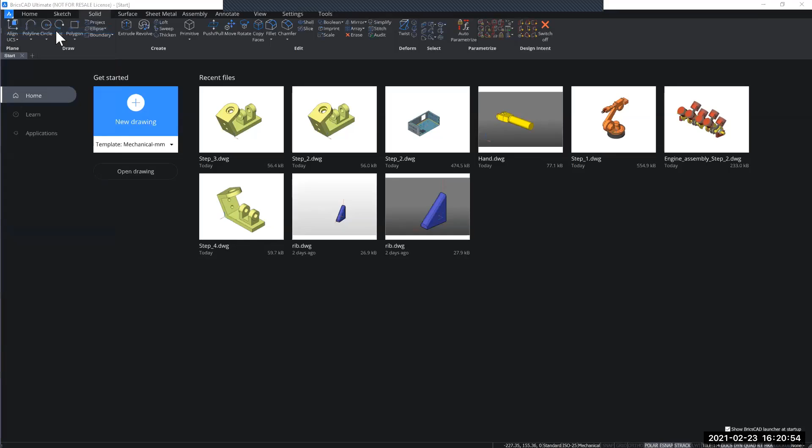And here I get some more options on how to create my new drawing. I will be choosing the start from template. If I select the next option, it will suggest me the basic templates that come with the application.

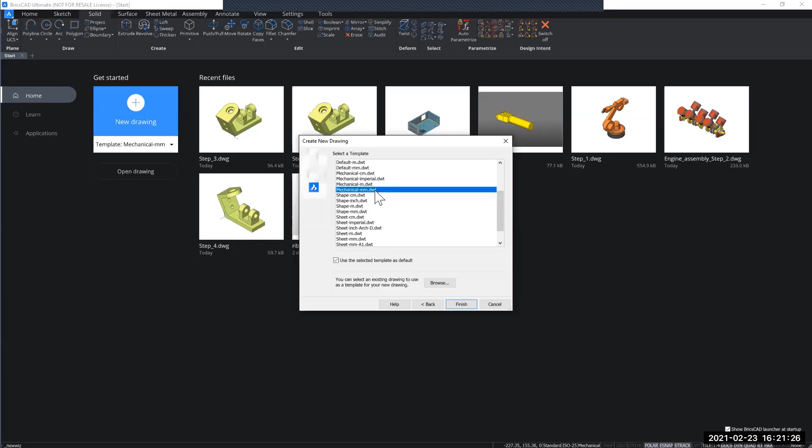You can also browse other templates that you might have created for yourself. But for this exercise, we will use the Mechanical-mm.dwt template. Once I click finish, I will be taken into the new drawing.

Now, when you sketch in BricsCAD, you can, of course, just sketch freely in the model space as such. But in this exercise, it instructs us to set up a certain set of variables. So I am going to do that.

As it says, it wants me to change the snap type. This I can do in the command line at the bottom of my screen. So I will activate snap type, and it tells me to set it to 0, which I will do. You can see now that the command is active.

You can see it through the command line dialog, that it tells me what to do for the next steps in the active command. And I will feed it the information it asks for, as it tells me in the instructions.

So I will continue typing the values and the commands listed in the training, such as snap mode, which I will set to 1. Grid mode, I will set to 1, and orbit auto target, which I will set to 1.

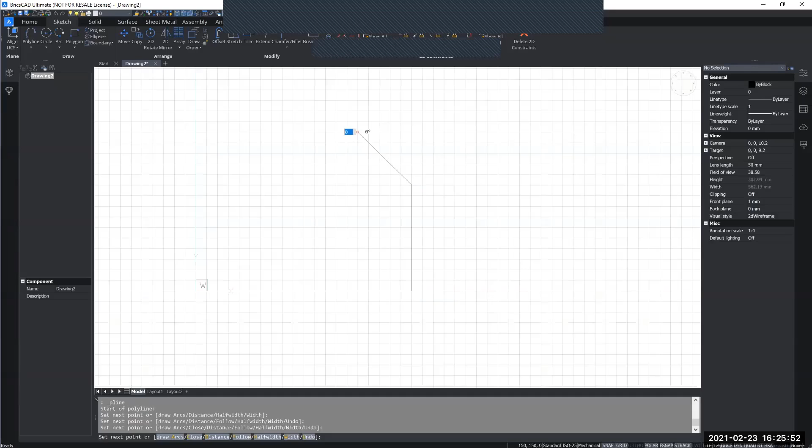So I will click to accept this. Following that up with a straight or horizontal 100 millimeter line. And then another 130-degree downwards line of 70.71 millimeters.

Now I can manually attach the last point here down to finish my sketch, but I can go down to the bottom of my screen to the command line where I can see the different command line options.

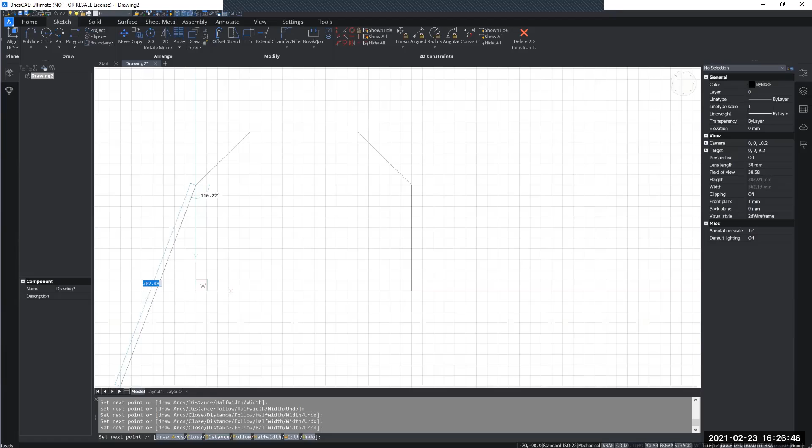Here you can see the different options such as the close option, which is what I will use. In newer versions, I can just click this option, but you can also type C or type it all out, close, in the command line and accept it. It will automatically close the geometry for you, and it is now listed as, or classified as, a polyline.

Now that showed us how to sketch with a grid. From now on, we will be working with a solid. So I'm going to follow step 7 and turn off some of these variables again, such as setting snap mode back to 0, grid mode back to 0, and changing the visual style back to mechanical.

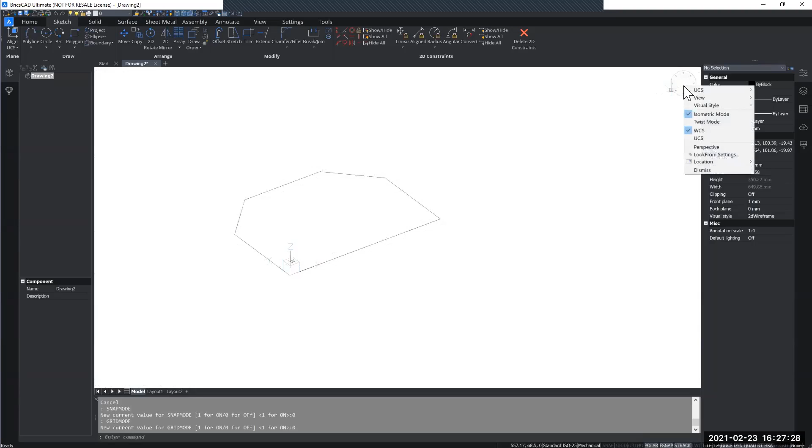This time I'm doing this by right-clicking on the Look From tool, hovering over the Visual Style sub-option, and selecting Mechanical. But of course, you can also do that by using the Visual Styles command as we did earlier.

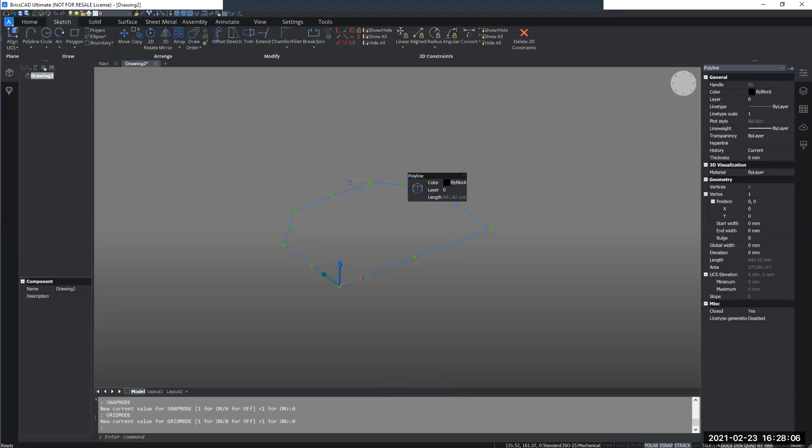Now we will want to extrude this sketch. For this, you can either highlight or select the sketch itself, or you can use boundary detection. The only difference is that if you use the sketch to extrude, the sketch will be consumed and only the solid will be left. If you use the boundary, you will still have the sketch here. However, for this exercise, it is not that important exactly which method you use.

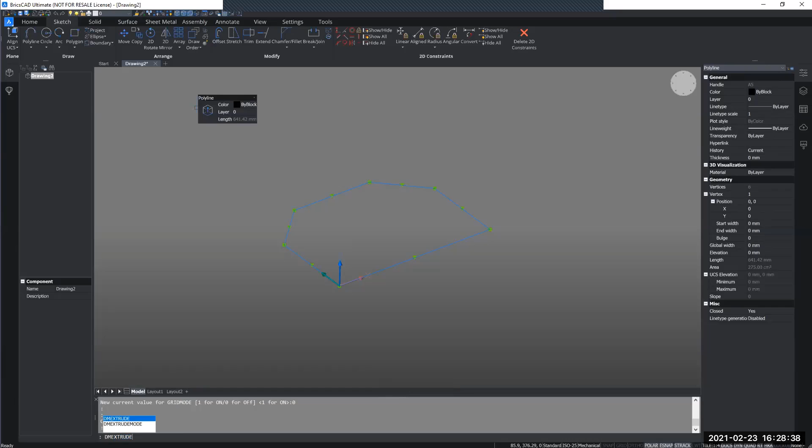So you can type in the dm extrude command in the command line. I'm going to change the color just to make it a bit more pleasant to look at. So I can type in dm extrude and then extrude it downwards, or 20 millimeters as instructed.

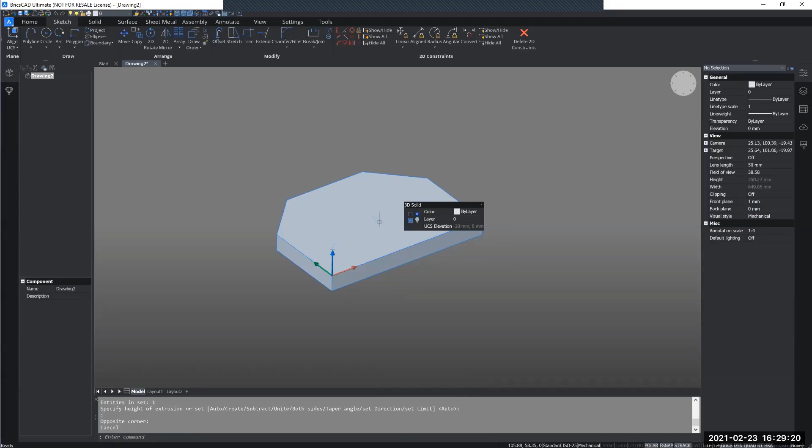Step 8 is also telling me to change the color of this base to green, so I will select it. To select it, you can hover over your model and hold down your Control key to have your solid highlighted. While it is highlighted like this, I will click it, and then I have my solid selected.

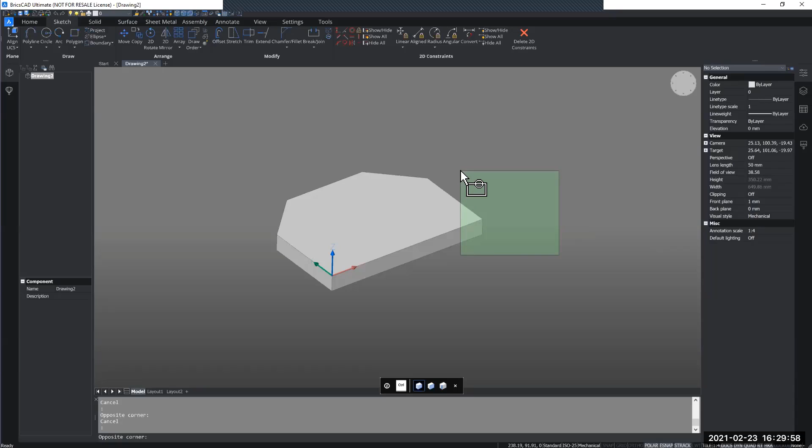I can also use selection windows. You might be familiar with this, that you can click somewhere on your screen and drag your cursor to either side. If I drag my cursor to the right, it will select anything that is completely engulfed by this selection window. If I drag it to the left, it will select anything that just touches this selection window, as such. Then from the properties panel, I can go to the color section, and I can select the green color.

Again, if you do not have this properties panel, you can right-click on your ribbon, hover over panels, and you can find the properties panel down here.

So for the next steps, we are going to be using sketches, and we will be sketching on the solid model itself. Therefore, it is useful for you to have the dynamic UCS activated.

You can see if you have the dynamic UCS activated down on your status bar, it will be called DUCS. Here you can toggle it on and off, similar to the eSnap settings. You can also use the F6 key on your keyboard to toggle this setting.

What this DUCS option, or dynamic UCS, will do is align the origin point, in a sense, to what you are selecting or hovering over when having a command active. I will be showing it now.

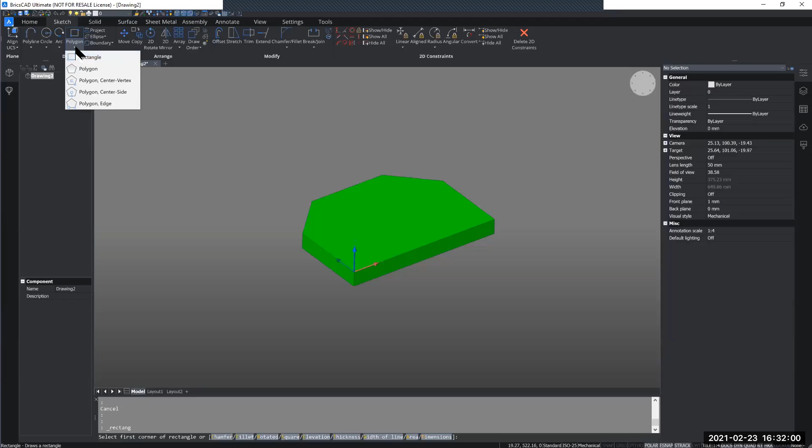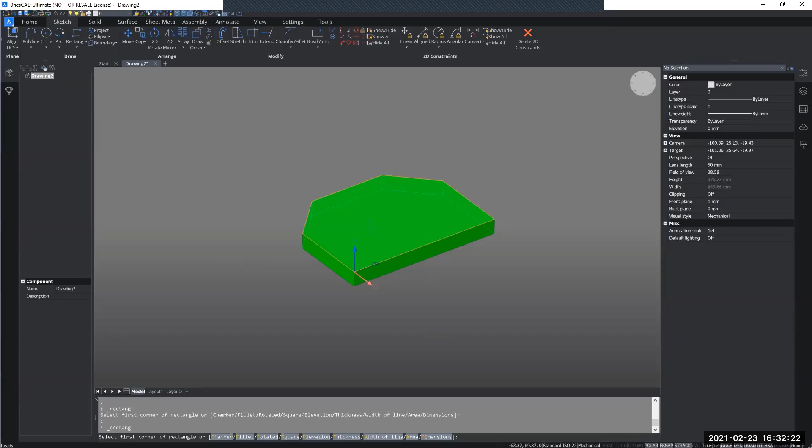And now I can choose what side of this to sketch on. As you can see, the coordinate system is kind of adapting to the face I am putting my cursor on, and this is what the dynamic UCS does. So now it is aligned with this surface, and I can sketch on this.

However, if I want to be completely sure that it is locked onto this surface and my sketch will stay on this surface, I can click the Shift key on my keyboard while hovering over it, and it will turn a darker color. Then you will know that what you sketch will remain in this plane.

So I will just change the color of my sketch so it is a bit easier to see.

And then I will start drawing my rectangle. I just click somewhere to start the command, and then I select the second position to finish it. I will be prompted with these measurements, as you can see. The one highlighted in blue is the one I can currently edit by typing on my keyboard, and I will give it the value of 60 millimeters in that direction.

To change to the other measurement, I can press Tab on my keyboard, and it will change to the other one, and I can type in 20 millimeters there as instructed in the guide.

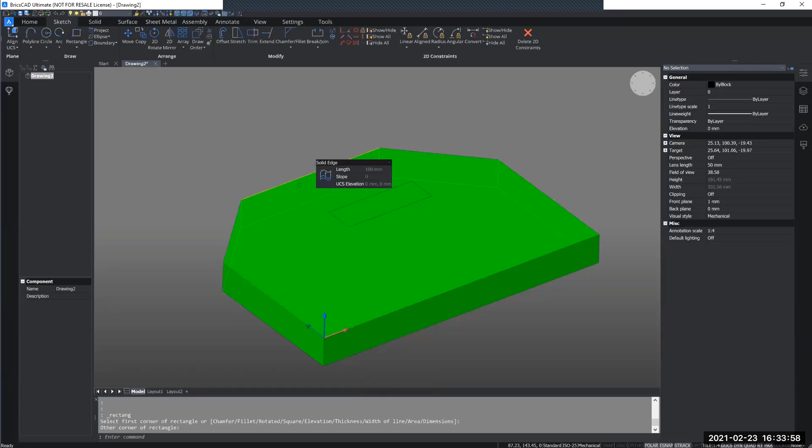Now it is also saying that this rectangle should be aligned in the middle of this edge here and up against it. To do this, we can use the move commands. So I can select my rectangle and use the move command, or DMMOVE command.

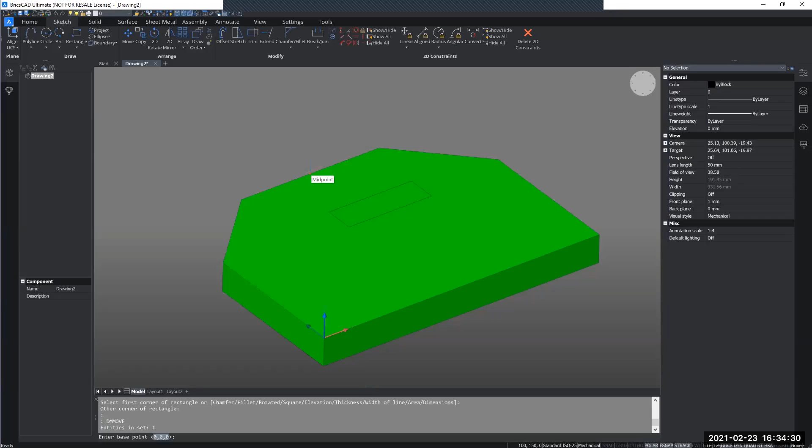Now I want to snap the midpoint of my rectangle onto the midpoint of this back edge. This is where the eSnap settings are important, so you need to have the midpoint snapping options active. If you do not have it active in the eSnap settings on your status bar, you can always hold Shift and right click, and here you can activate it.

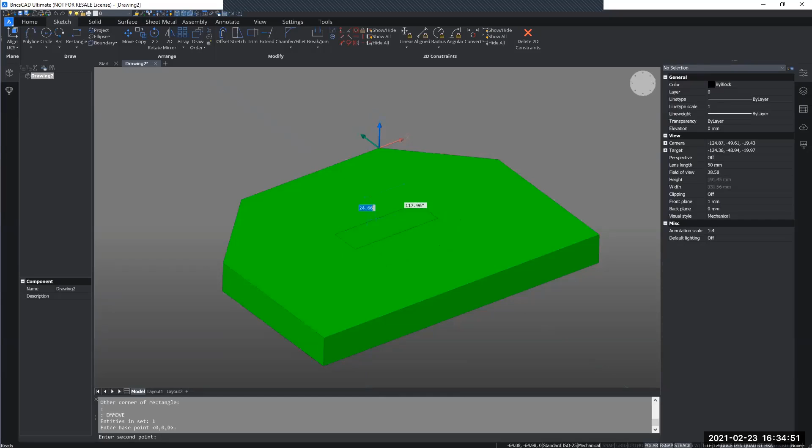And then I can select the midpoint of my sketch. Now I can move it around freely, as you can see, and then I can snap it onto the midpoint of the back edge.

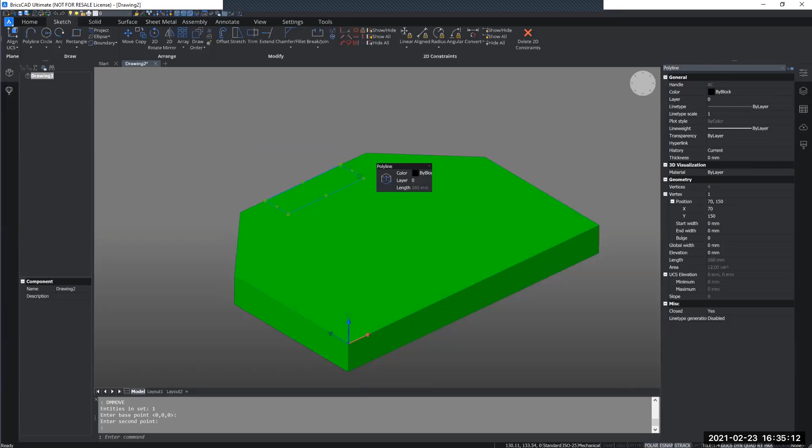Once that is done, I can extrude it similarly to what I did with the base flange. I can now show it by selecting or hovering over the sketch, and go into my quad under the model tab. Here I can find the solid extrude option, and I will give it a value of 150 millimeters as instructed in the guide.

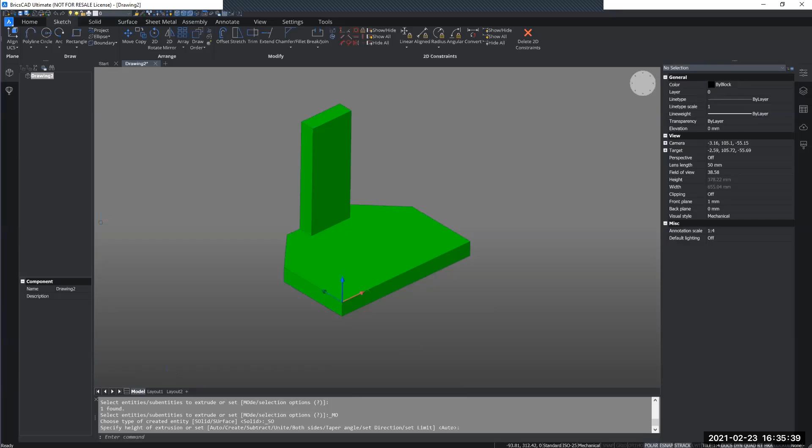Following this is step 11, where I will create a circle on this face. To do this, you can type the circle command in the command line, or go to the ribbon and activate the circle command.

Again, you need the midpoint snapping options active, as you want to start the circle off in this midpoint. Make sure you are not aligned with this top face, as the sketch or the circle will be tilted the wrong way.

You will have to sketch it on this face. To make sure that you do so, you can hover over it and click Shift to lock into the surface. So now, even if I hover over the other face, it will still sketch in the face that I locked into.

So I will draw the circle sketch. It does not give me a value in the radius, it only tells me to snap onto the corner of my model.

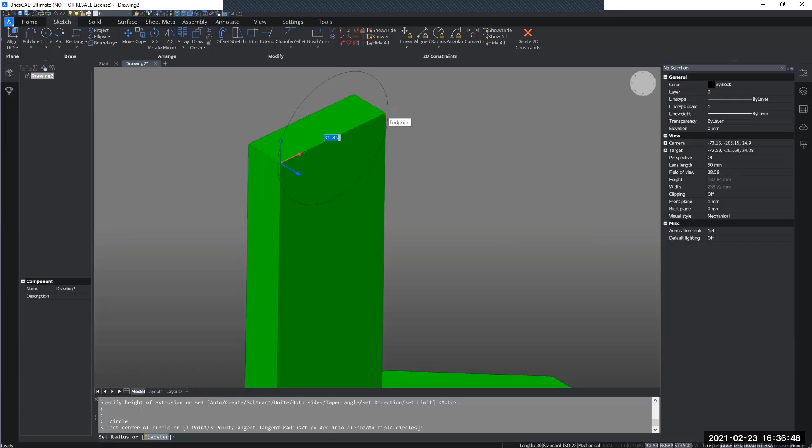So I will need the endpoint snapping option active, as this is listed as an endpoint. Again, you can find the snapping options in eSnap on the bottom of your screen in the status bar, or by holding Shift and right-clicking. And so that distance decides my radius.

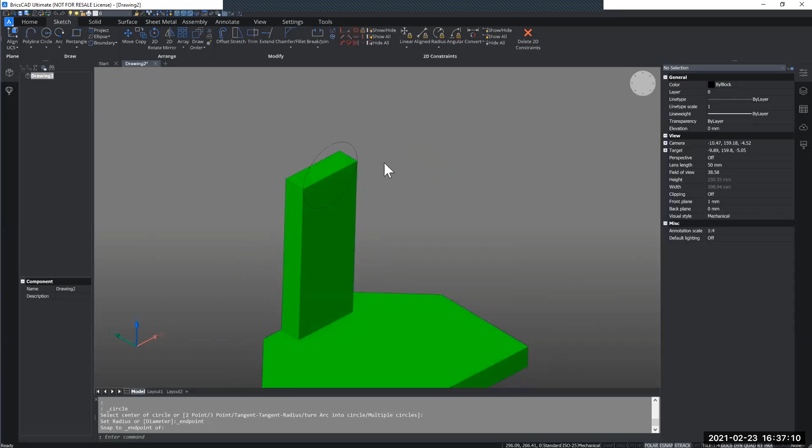From then, I will similarly extrude my circle. I will extrude it outwards like this by 130 millimeters.

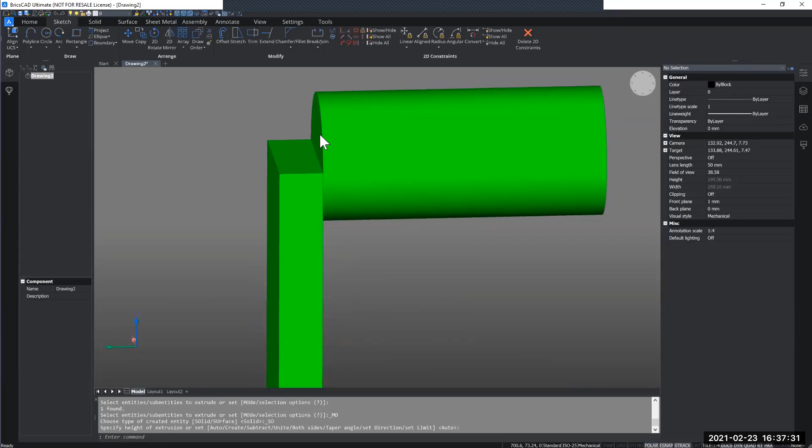Now for step 12, you can see that there is a bit of a notch in the back here, as this is where the sketch originated from, and I only extruded it in the direction outwards from here. But I would like to make this backside flush.

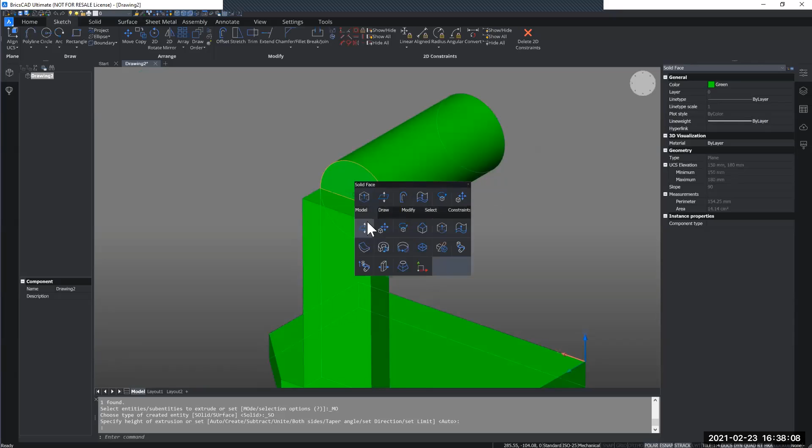To do this, you will need to pay attention to your selection modes. You need to have the selection of faces active, because then you can hover over and select this back face, or the half circle back face of this cylinder geometry. And then similarly, you can extrude this as well.

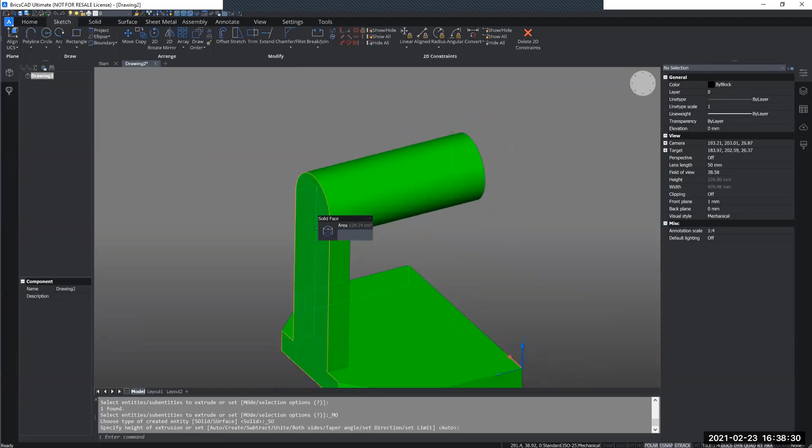You can snap it onto the endpoint here, for example, or the midpoint, and it will extrude the geometry until the endpoint there. So I have created a flush, nice look on the back of my model.

Now to introduce something new, there is something called design intent in BricsCAD. If I go to the solid tab, as we are doing solid editing now, you will see the section called design intent right over my cursor here. These settings will determine how your different solids or the geometry of your model behaves depending on other aspects of your geometry.

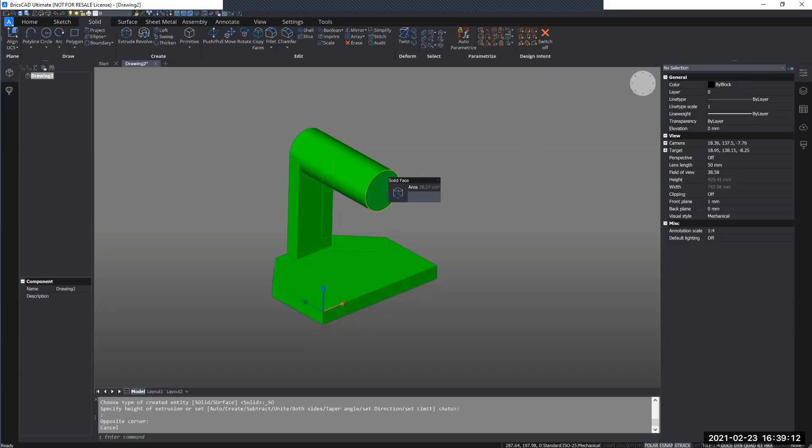So if I now try to move this face here, I will hover over this face and call the push-pull command through the quad and the model tab. You will see that I can push and pull on this face and extend it and shorten it.

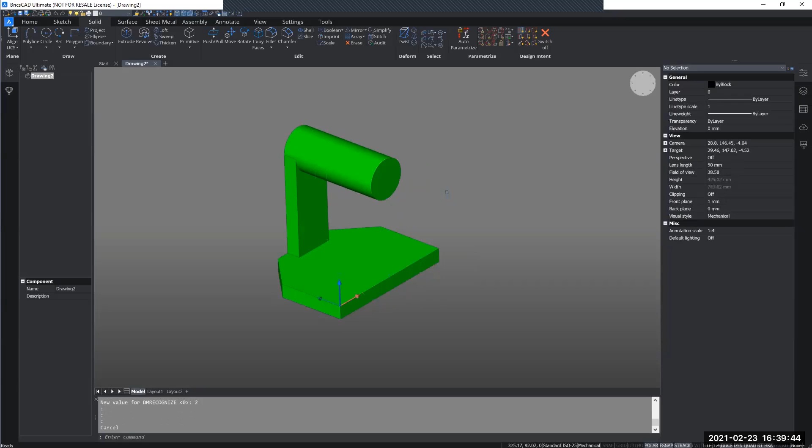But with this design intent option here that I will activate called coincident planes, it will detect places that are coincident to each other. If I've done everything correctly now, this face should be coincident with the bottom face of the base. So if I now again try to push-pull on this face, it will also adjust any coincident faces on my model.

So that's an example of something design intent can do. We will also see more of the design intent options later in the training.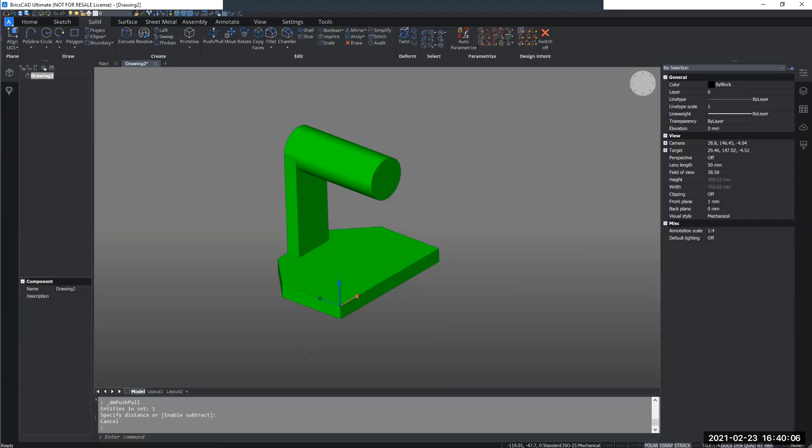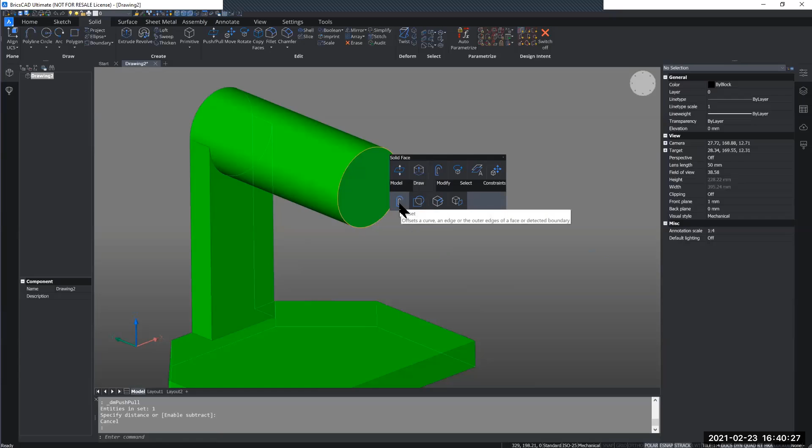But first, I would like to hollow out this cylinder right here. To do this, I can create another circle sketch as before, but I can also hover over it and go through my quad to the draw section. Here I can find the offset tool. I can also select my face and go to the Sketch tab where I can also find the offset tool, but I find it easier to just go through the quad and get used to using it.

Here you can see it is creating an offset sketch of the outer geometry of the cylinder. It is taking the shape of the cylinder and offsetting a new sketch for me. I will move it inwards and give it a value of 5 millimeters. So now I have created a circular sketch, offset 5 millimeters from the outside of the cylinder.

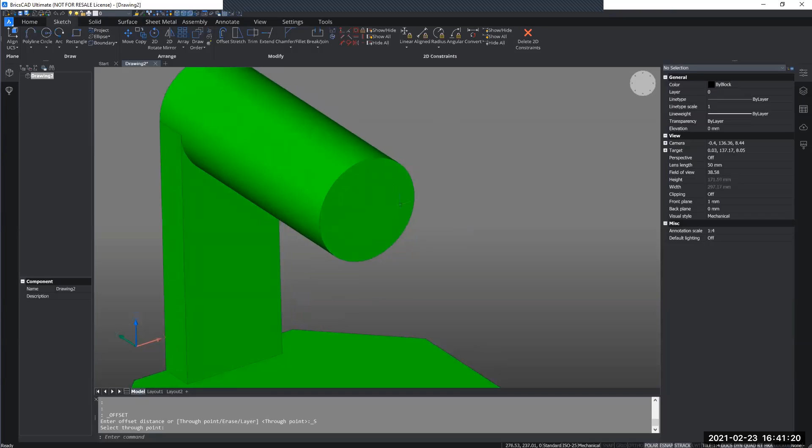Then, like before, I will select the sketch and extrude it. But instead of adding material this time, I'm going to go in towards my model and all the way through, so that I extrude a hole all the way through my model.

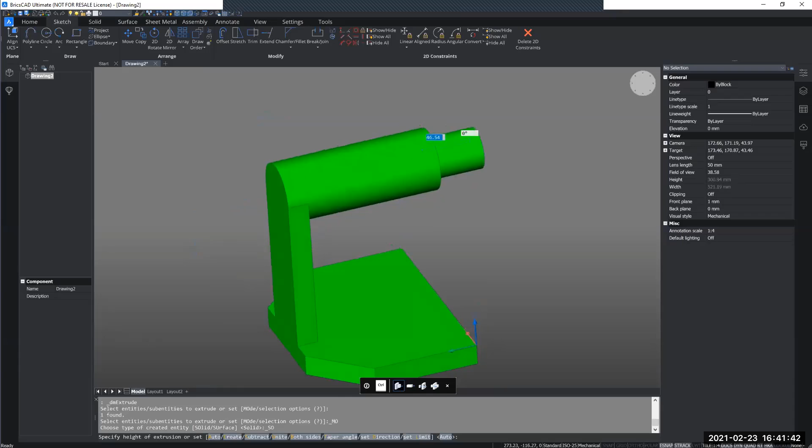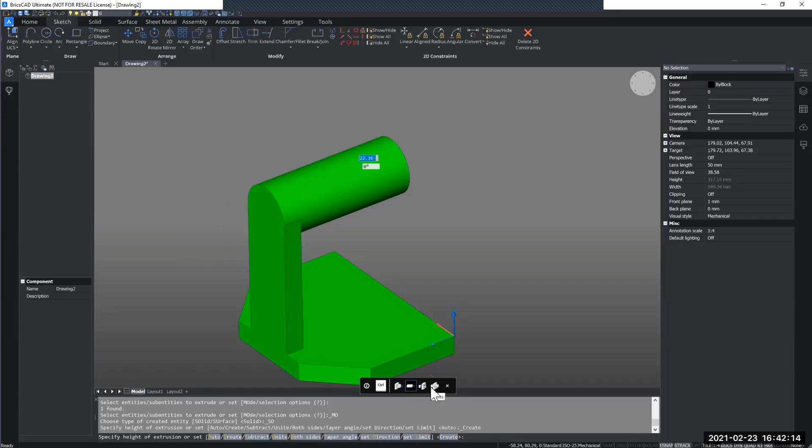If your program does not remove material, you can check the bottom here, right over my command line. You can see there are different control toggle options. If you have your command active and you toggle the control button on your keyboard, you can toggle between options such as now it is in the auto setting. If I toggle, I can go to the create option where it will only create new material. There is also subtract and unite, but I will just let it go on auto and it will detect for me that I am removing material. The distance doesn't matter as long as it protrudes away or through the back face here.

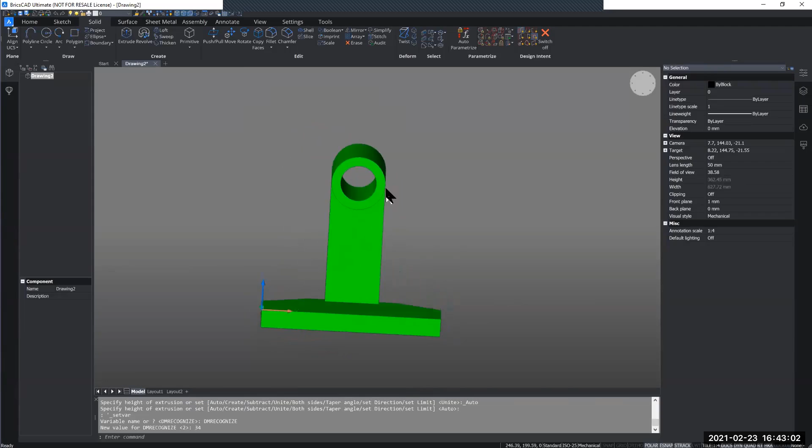For step 16, we will try a new design intent in the solid tab. Here I will activate the coaxial surfaces option. This will detect any circular surfaces that share a center, and revolve around the same point, which should be these two faces or these two cylinders.

So if I try to now use the move command, I can select that I want to move the outer face of this cylinder. And I will select this, and now I can move the cylinder around, and the inner face will stay coaxial and share the same center as the outer face.

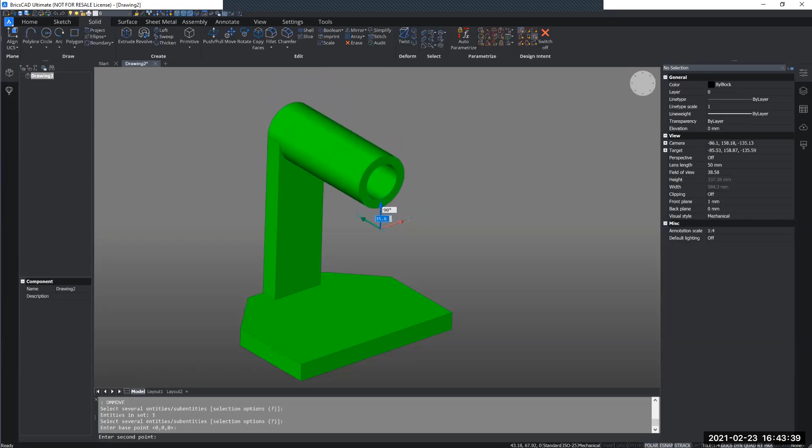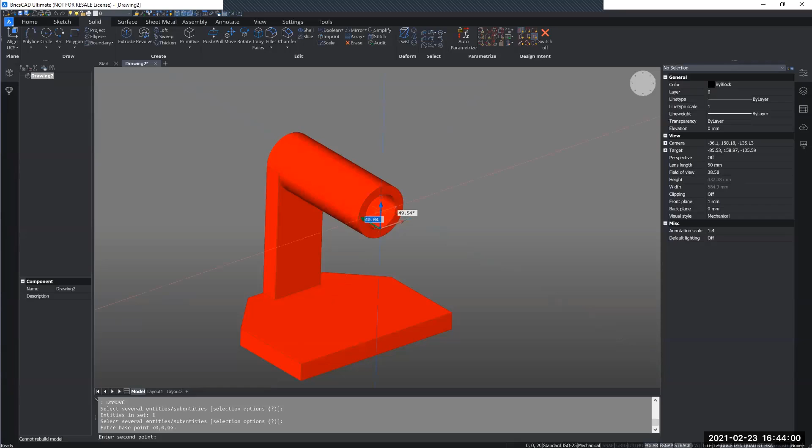If you try this and try to move it around, you might see this result where you move your cursor and nothing is happening and it turns red. If you hold the shift key on your keyboard while you're trying to move it, the cursor or movement will lock itself to a certain axis in your drawing. So if I now hold shift and move my cursor up along the Z axis, it will stick to this axis even if I move my cursor around other places. That's a little trick to make it a little bit easier.

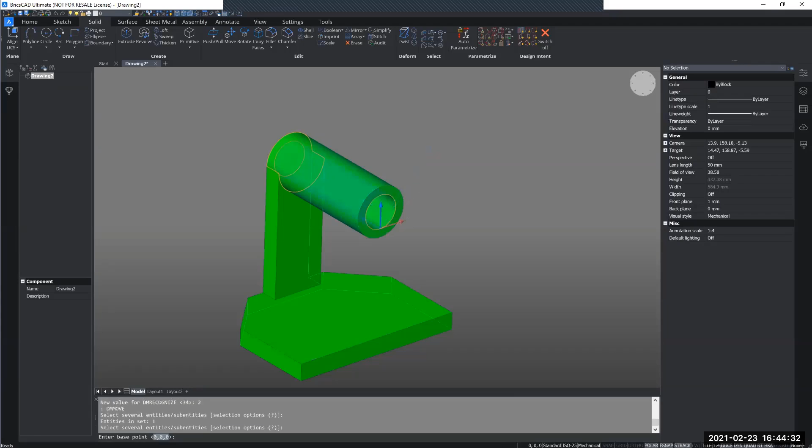If I disable this coaxial design intent and try to move it again, I can show you what happens. I will select exactly the same things as before and try to move it, but now it only moves the geometry of the cylinder and the outer face, and the hole that goes through it will remain in the same place. So that will show you how the coaxial design intent works.

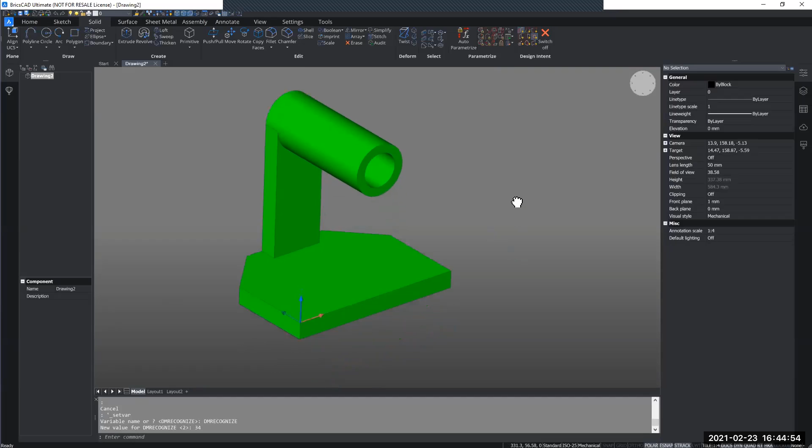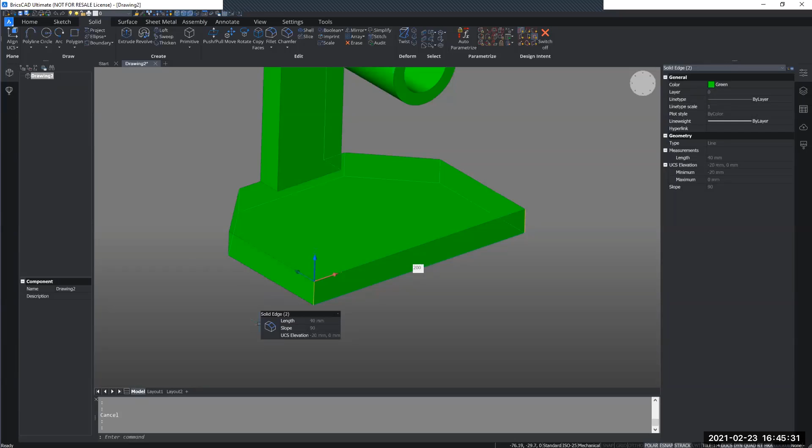Now to add some more detailing to our part, we want to add some fillets to the front of the base here. We can select the edges one by one and apply a fillet, because that is what is instructed to give it a fillet. But you can also select both of the edges at once. Make sure you have the selection of edges activated on the top of your screen. Then we can type in the command dm fillet, or we can also go through the quad to access the fillet command, or you can also go through the ribbon, of course. And I will give that a value of 25 millimeters, as such.

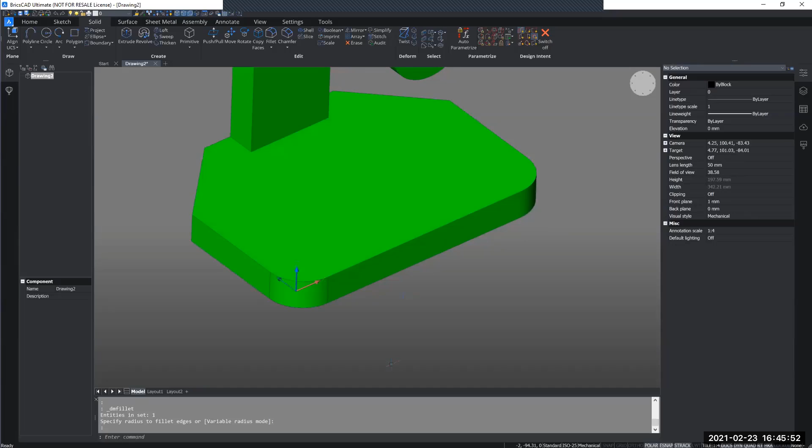Following this, we want to create 2 holes as well on the base, and we want these holes to share the same center as these radiuses or radii.

So for the next exercise, you will need to have the eSnap option center active, as you will see shortly. I will activate the circle command from the ribbon like I've done before. I will hover over the face I want to place the holes and click Shift to lock into it.

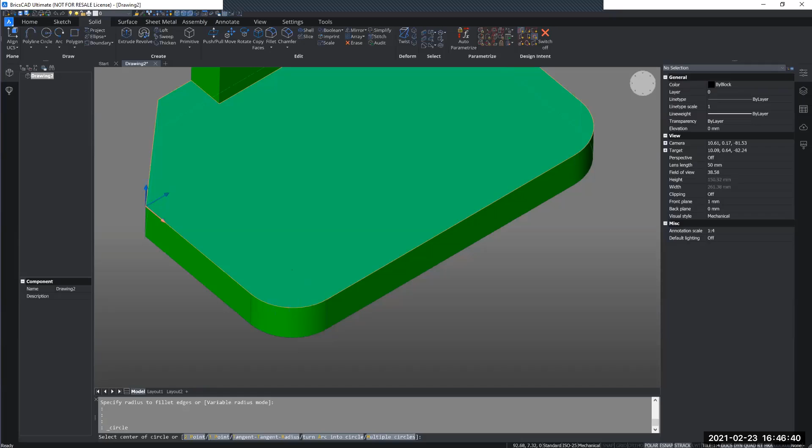Now with the center snapping option active, I can hover over the curve of this fillet, and you can see that a plus sign appeared in the center of the fillet, which is a snapping point that I can place my sketch on. By selecting the snapping point, I can then create my circular sketch.

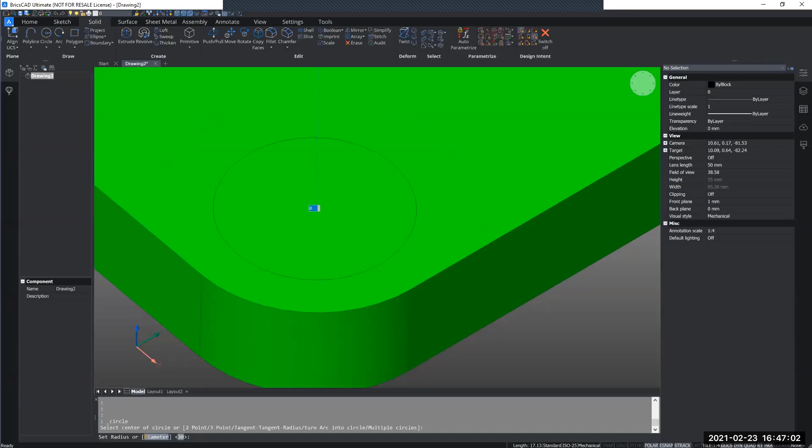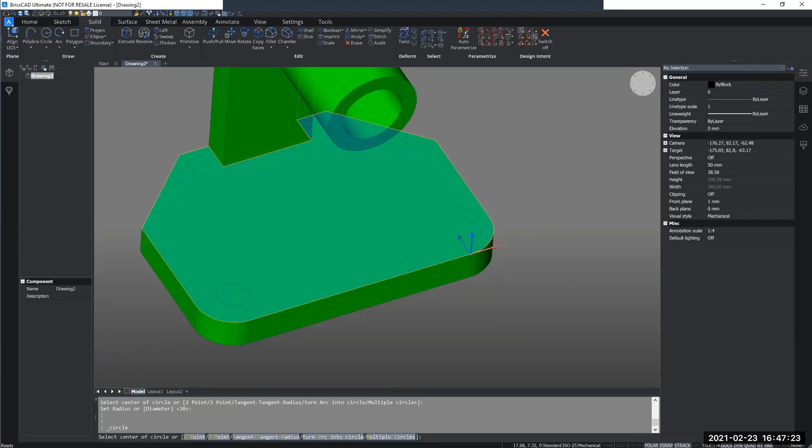I will give this circle a value of 10 millimeters in the radius, and I will do that for the other side as well, just hovering over the curvature on the top face, and then the center snapping point will appear.

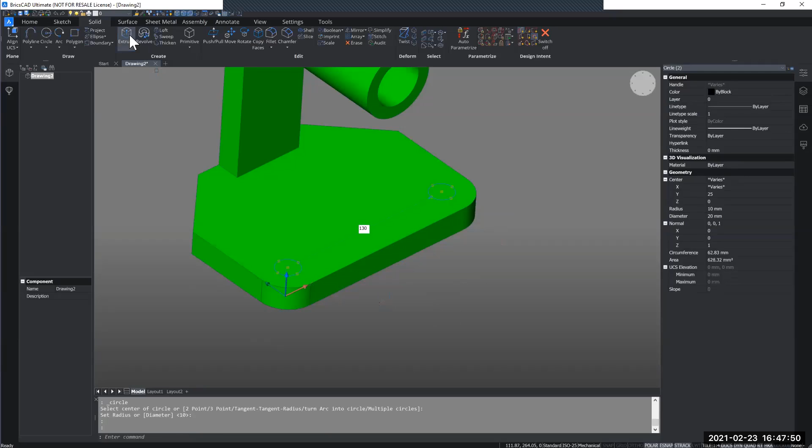Now I want to create holes from these sketches, so I can again select the boundaries or the sketches like before. I can do it one by one, or I can select both of them at once, and then use the extrude command like before, pulling the extrusion downwards through the base until it is creating a hole, and just clicking to accept the extrusion length.

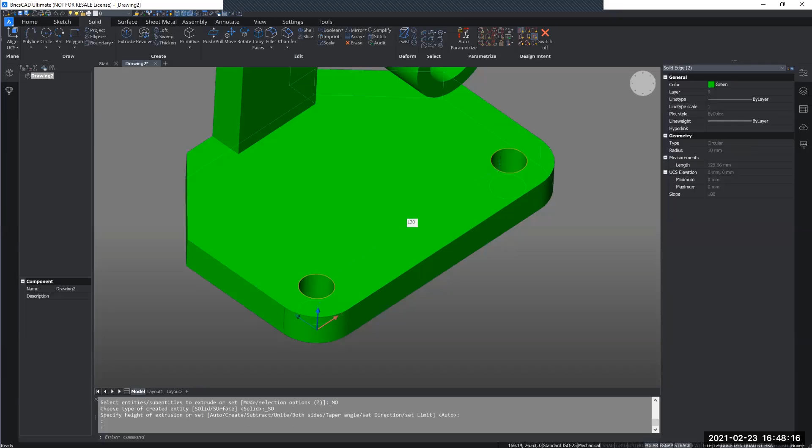Now, similarly to the fillets, I want to create some chamfers around these holes. You can do them also by selecting them one by one, or you can click and select both at once. Then you can go through the quad, the model tab, and select chamfer, or you can go through the command line or the ribbon.

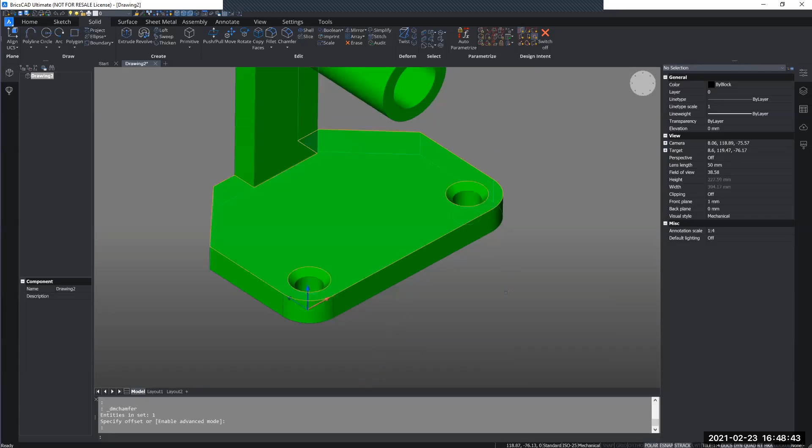Once active, you can see a preview like with the other commands, and I can give it a value of, what is it, 5 millimeters, I think, yes. As such.

Next up, we want to draw another rectangle on top here. We want to add some support to the underside of this cylinder geometry. So similarly to the earlier step, I will activate the rectangle command, lock onto the surface on top, and create my sketch. This sketch should have its longest side pointing away from the existing support.

I will give the short side here a value of 20 millimeters, the long one a value of 50. Again, I type in the value and I press tab to tab between the different measurements. Hit enter to accept. And similarly to before, I can move this part by snapping onto the middle here.

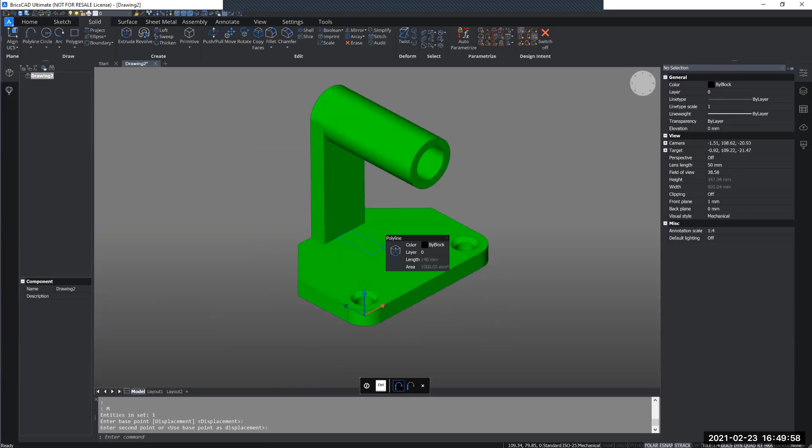And I can move it by snapping onto the midpoint of this line or this edge of the support here. Now I want to extrude this as well, so I will select the sketch, use the extrude command.

But instead of giving it a value, this time I want it to reach the outer geometry of my part. I can try to place it manually, but there's a risk of it poking through the other side here. So in the command line dialog, you can see there are some different options I have been given.

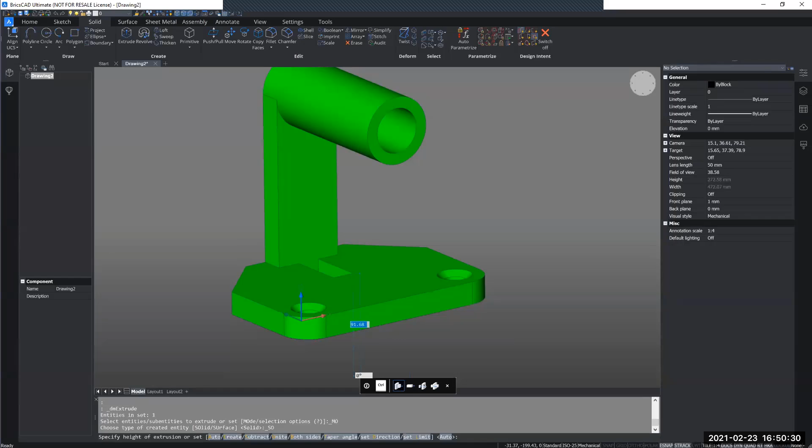I will be using the set limit option. I can click it here, or I can type L and enter into the command line. Then it will ask me to select a face or body to limit extrude. I want the outer face of the cylinder to be my limit, so I will select that face.

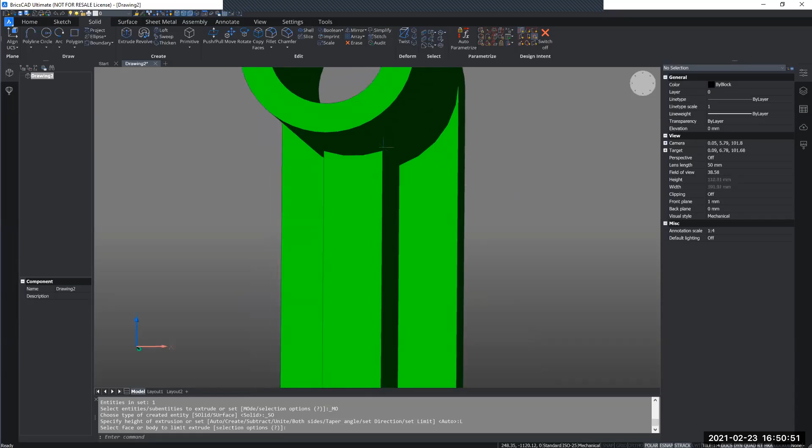And you can see it has been extruded to the outer limit of the cylinder, and it has adapted to the curvature of it without poking through on the other side.

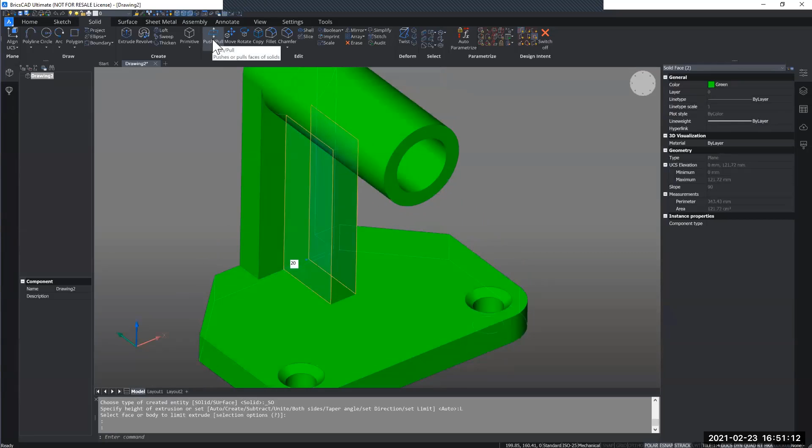Even like in step 22, if you select both sides of the rib, you can do that and use the push-pull tool, that is the DM push-pull tool. Oh, there's a lot of flickering.

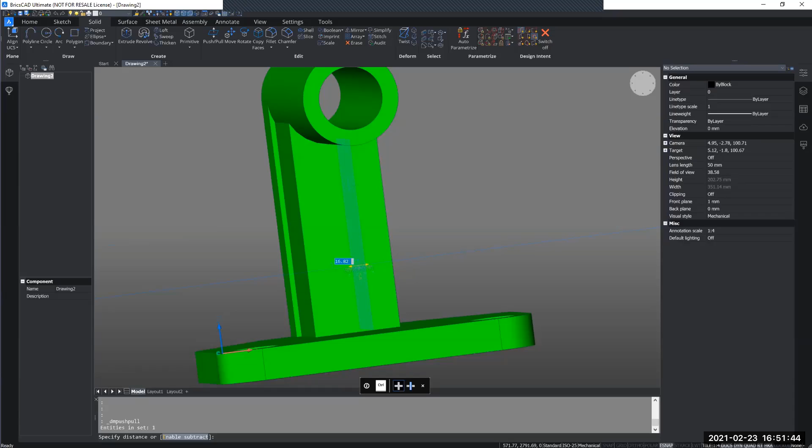But you can see here that I can change the width of the geometry, and it will still adapt to the size or the curvature of the cylinder. So even if you want to change the width later, it will still adapt with that set limit option.

Next up, I want to add some simple constraints to my model. I'm going to go to the Solid tab under the Parametrize option. I can also type in DMFix 3D, but I'm going to select the key lock option here and apply a fixed constraint on the back face here.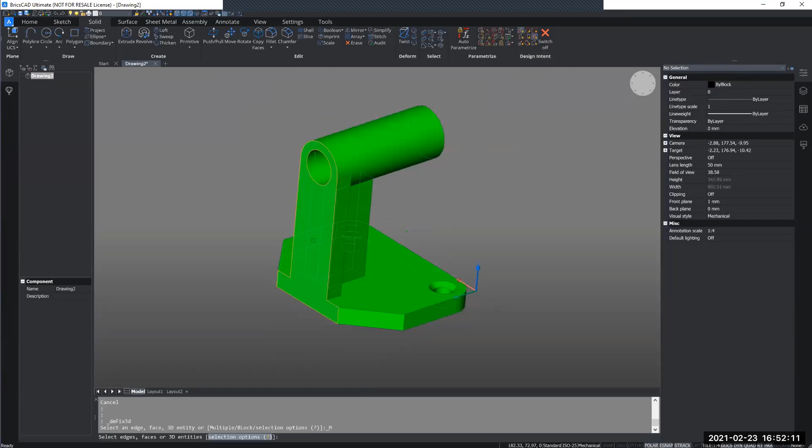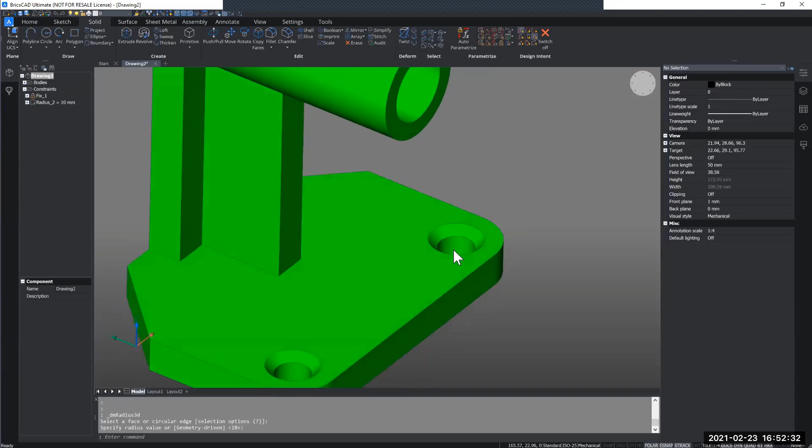And I will use the radius option, DM radius 3D, to place on this hole. I will accept the existing value. What this radius constraint does is that it can control the size of the hole, and you can see in the mechanical browser on the left side of my screen the different constraints I have created.

I will be able to then change the value of it manually, but I can also right-click it and animate it to see exactly what it does. So when I animate it, you should see the hole change size. As you can see, only one of the holes moved, but what if I want the other one to change as well?

Then I can either place a new constraint on this, although it's not necessary to place two constraints. I can activate the design intent called equal radius, since the holes are of a similar size. Now it should recognize that these are the same size, and the program will try to keep them the same size. So if I animate this constraint again, you can see both of the holes change in size.

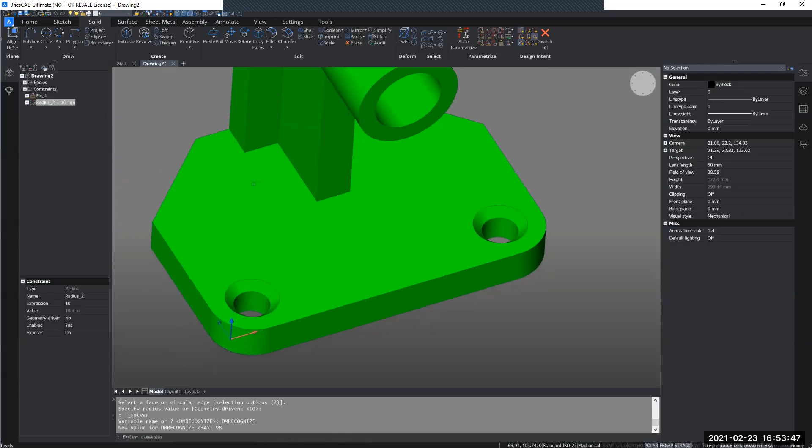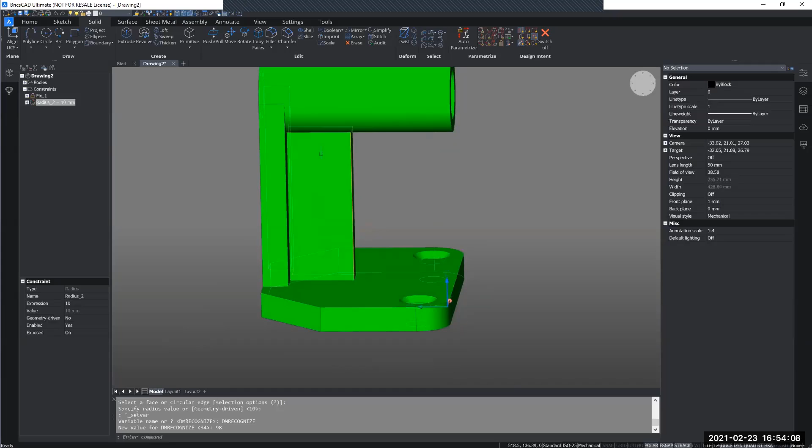Now, closing in on the end of this exercise, I want to add an angle constraint on this face. I want it to be angled in the vertical way, pointing a little bit more inwards towards the top. So I can use the constraint angle, DM angle 3D.

I will select the back face first, and then the front face. For this specific example it doesn't matter, but normally the side you select first is the one that will change, and the second side you pick will not move, I believe. However, in this example it's not important, as we have a fixed constraint on the back here, so this will not change no matter what. So you can pick the back face or the front face first.

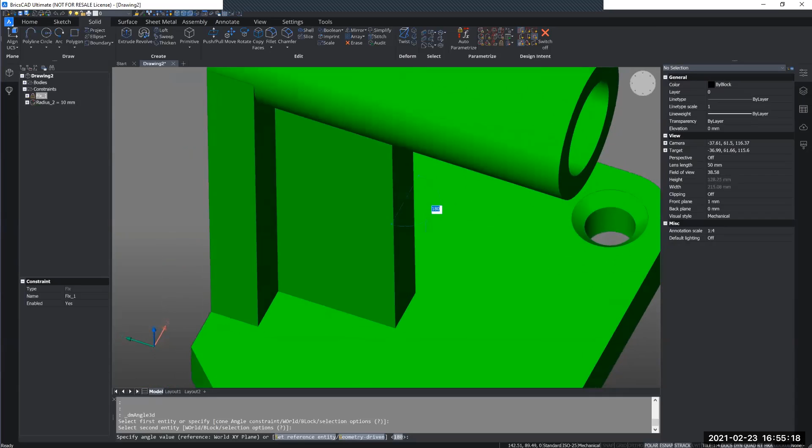The only issue now is that you can see the angle is working horizontally rather than vertically. So if I were to accept this, the angle would not move in the direction I wanted. Therefore, I have the option in the command line dialog to set a reference entity.

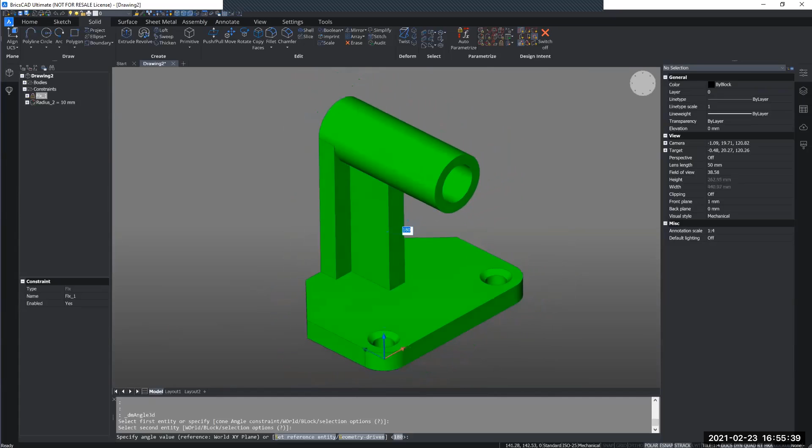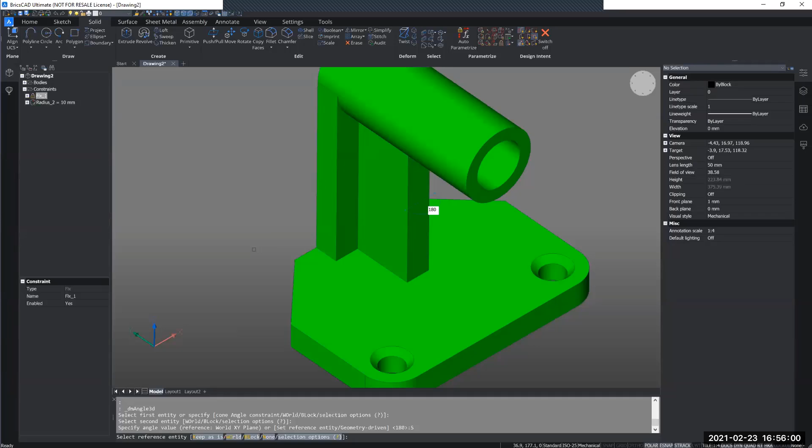The way this works is that now it rotates around a center point that moves in the Z direction, upwards and downwards. However, I want the angle constraint to rotate around a line that moves along the x-axis. So I will select reference entity, and select a line on my model that moves along the x-axis. This small edge back here moves along the x-axis, and should give me a line that will orient the angle to rotate the correct way.

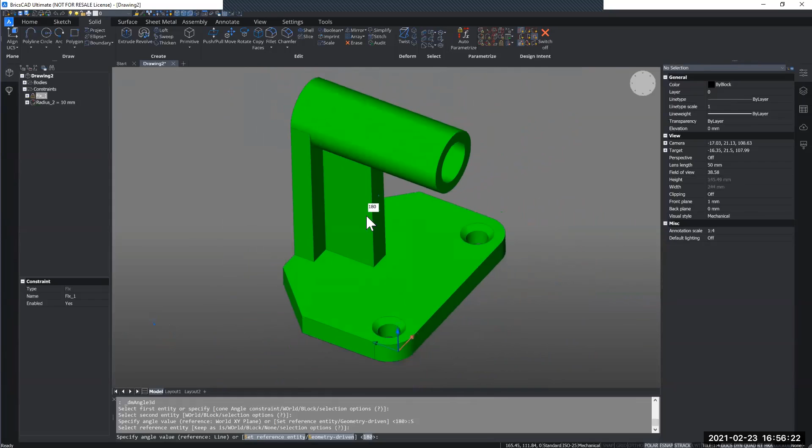It might be a bit difficult to see, but the angle is now oriented the correct way. I will just hit enter to accept this value. In the mechanical browser on the left side of my screen, you can see it created an angle constraint with 180 degrees in value.

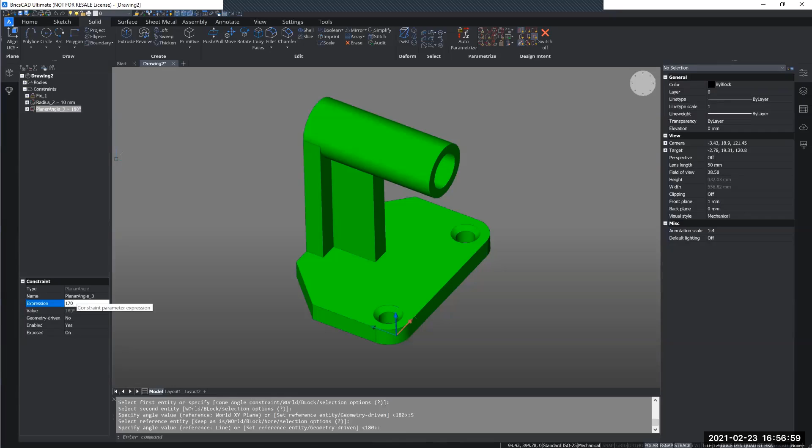If I select this constraint and go to the bottom of the mechanical browser, you can see that I can change the expression of it. I will change it by 10 degrees down to 170 degrees, and you can see it's tilting forward. However, I want it to tilt backwards, so I will change it to 190, and that looks like the result I wanted.

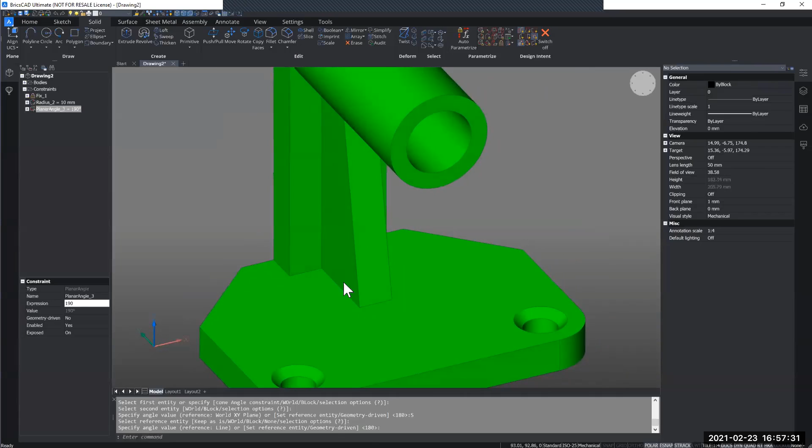So now we have placed some simple constraints on the model. Lastly, I want to just add some cosmetic fillets onto this shape. You can do that by selecting the edges manually one by one. You can also hover over the face, go through the quad to the select category, and here you have an option to select all edges connected to this face.

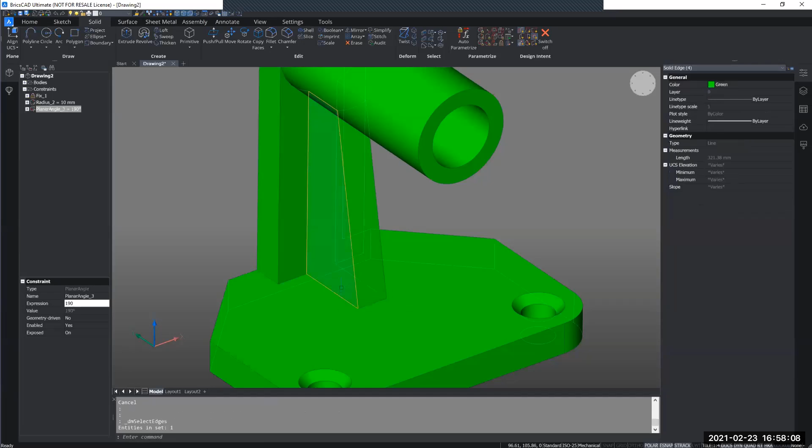You can also hover over the edges, and you can have other options such as selecting an edge network. But for now, I'm going to use the option to select all edges connected to the face, and I can select some manually as well.

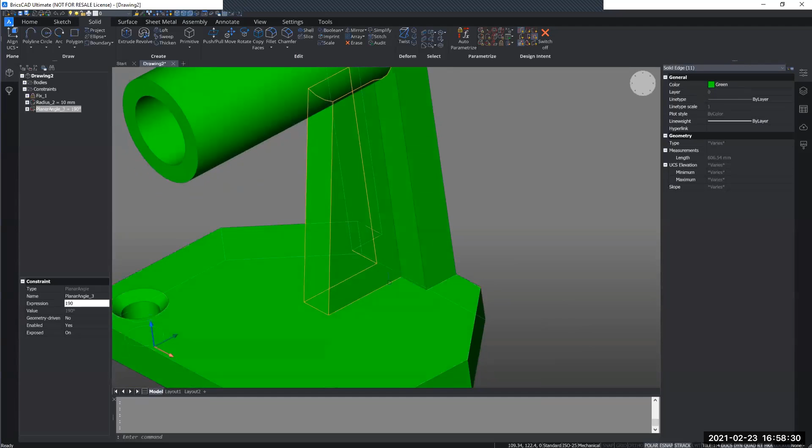So like before, you can chain or select several edges at once to apply the fillets to, or you can do them one by one. Just keep in mind that when you select several edges at once, you will have to give them the same value, as all of them change similarly. So now I've given all of those edges a 3 mm radius.